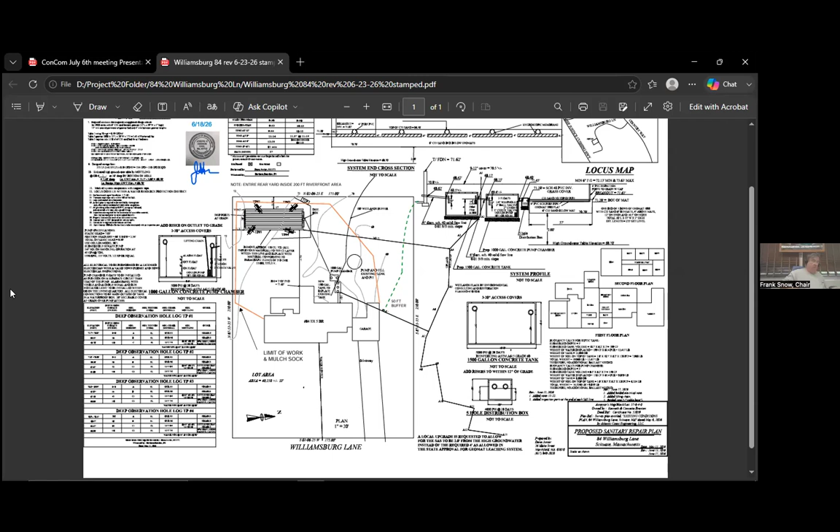Great, thank you. Sure. Okay, so this is a notice of intent for a 5-bedroom septic replacement. The resource areas on this site include proposed work within the 100-foot bordering vegetated wetland (BVW). It's 92.6 feet to the proposed septic tank. We're also in the 200-foot riverfront area, and the entire rear yard is in the riverfront area.

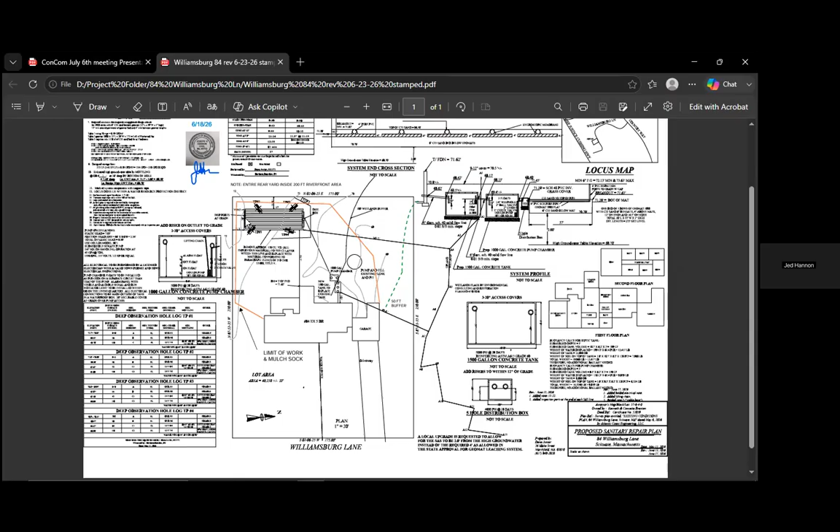The layout, as you can see if you zoom in, basically puts in a new 5-bed system with a 1,500-gallon tank, a 1,000-gallon chamber, a D-box, and a leaching field. The orange line represents the erosion controls. The circle represents the existing dated system that will be pumped and filled.

As required by Title V. The impacts to the resource areas, let me pull up those numbers. And they're all temporary, right, because everything's below grade. With the BVW, it's 113 square feet, and the riverfront area is 1253 square feet. But again, everything will be below grade.

All disturbed areas will be loamed and seeded, and erosion controls will be kept in place till the end of the project. Board of Health has reviewed this. We got a few comments back, we updated the plans, and the plans before you represent all the updates. Their only remaining comment is the review and approval from the Conservation Commission. That is all I have. I'd be happy to answer any questions.

Jenn Smith? I agree, the resource areas are in buffer to BVW and riverfront. Board of Health is okay with the plan. I don't have any other comments.

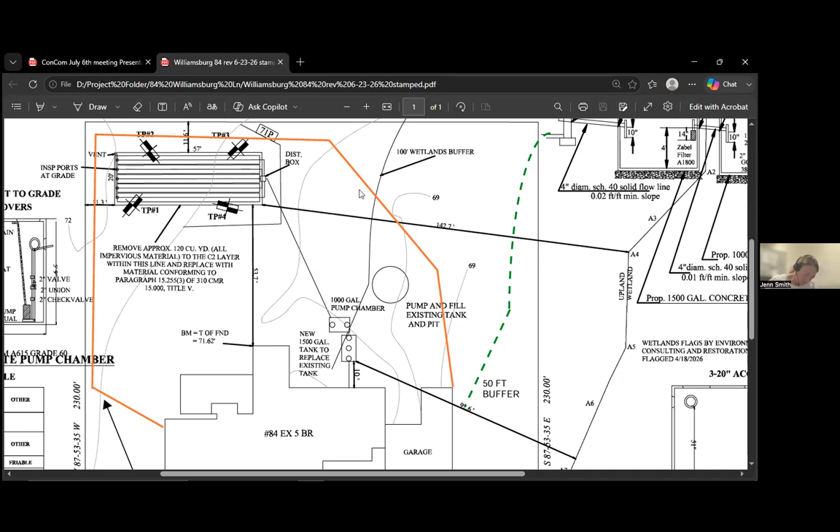Okay, I make a motion. Jen, is this 'close' or 'close and issue'? Close and issue. Okay, I make a motion to close and issue at 84 Williamsburg. It's a motion from Penny, do we have a second? I'll second, that's from Eric. All in favor? Roger, yes. And Frank, yes.

Great, okay, thank you Jed. You need Jen? Right, thank you, yeah, oh and Jen Foley. I'm so sorry. Jen says yes. That's awful, I'm offended. Still recovering from the heat from last week. I apologize, sure, something to blame it on. All right, thank you, thank you.

All right, so now we are on to 81 Surfside. Is this a continuance? 232 Country Way, no. It's 232 Country Way. Oh geez, I'm sorry, skipped down one, sorry.

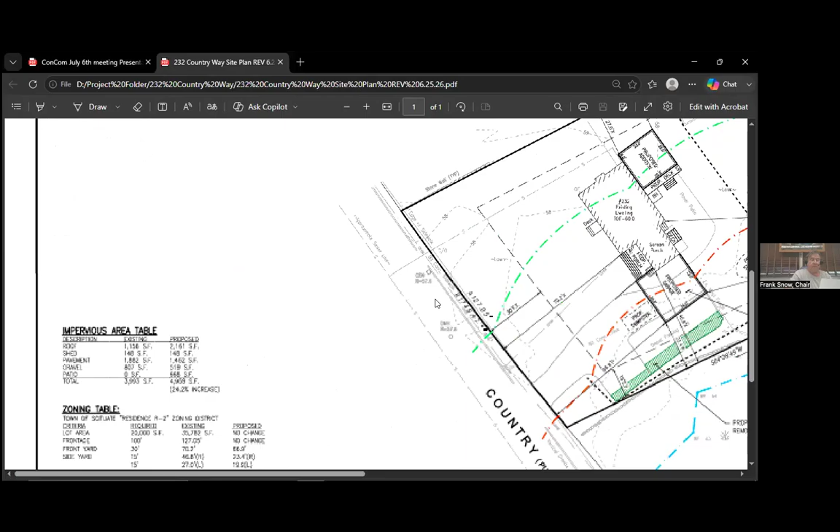On July 6, 2026, 6 p.m., the Scituate Conservation Commission will hold a wetlands hearing under Chapter 131, Section 40 of Massachusetts General Laws and Section 30700 Town of Scituate Code of Bylaws for a notice of intent filed by Nicholas Moore for the construction of an addition within the buffer to a wetlands resource located at 232 Country Way, Scituate. Abutters and other interested parties are invited to attend. Information to access the meeting is available on the agenda posted on the website.

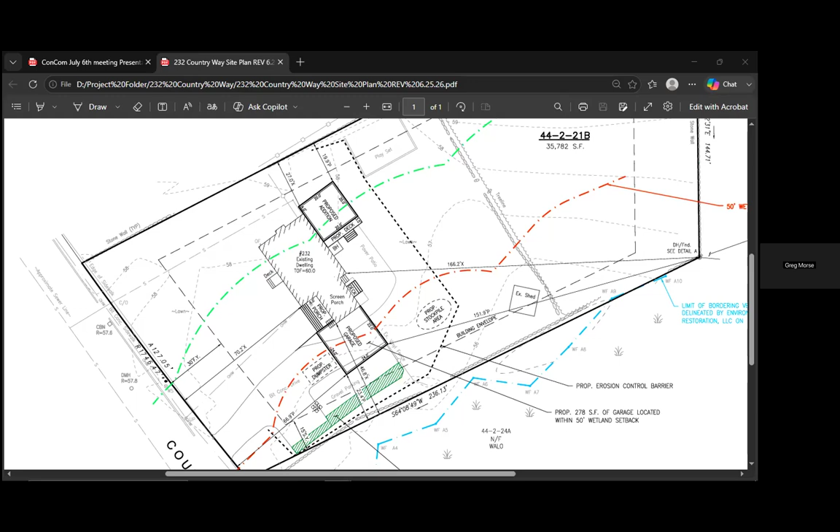Okay, so Greg, can you just walk me through the paved driveway? Where does the paved driveway end, is it on the back side of the proposed garage? Essentially, yes, there's a fence that goes from the back corner of the house over to the side lot line. And the paved driveway goes right up to that fence on that side. So you're going to leave the paved driveway that exists, just cutting out the part where the garage is, that's correct.

And then you're going to leave the gravel parking area? We're going to leave gravel parking with the exception of what you see in green there, a piece of gravel parking and a piece of the asphalt turnaround that gets cut out. It's about 308 square feet in its entirety that gets cut out. I see that, yeah, okay.

All right, I guess I understand why the garage belongs on that side of the house. That's typically where people already enter, and to put it on the other side you've got issues with the property line setback, and it just doesn't work well for the house. And the addition on the back is in the hundred, not as significant. But I do agree with Eric.

I think, maybe Jen, that there should be some additional plantings. What's your distance from the edge of the garage to the wetlands? Looks like it might be 40 feet. It's close to that, I don't have it labeled here, but we've got 35, we've got 23 and a half feet essentially to the side lot line, the stone wall, lawn right up to the stone wall. So I'll add some plantings inside that buffer area. I certainly heard that comment, and we'll add some buffer plantings in front of that wall.

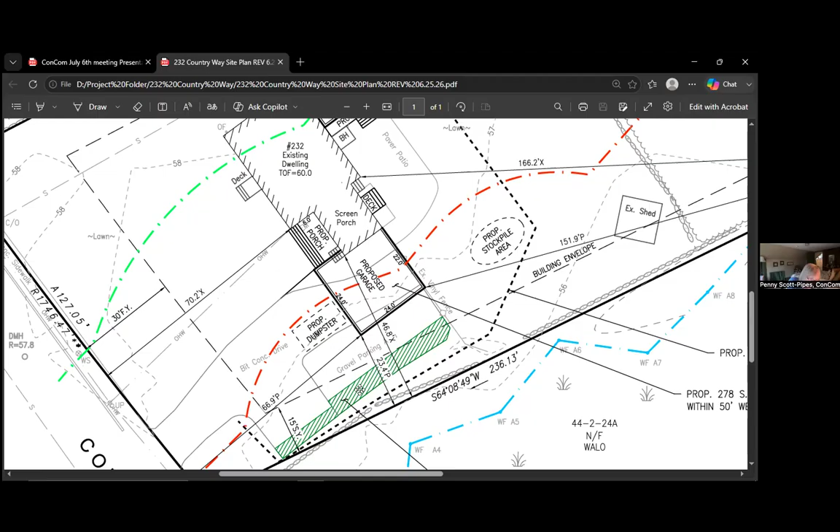Yeah, I think we've got about 11... 1, 2, 3, 4, 5, 6, 7, 8, 9, 10, 11, 12. We already have 13, so we're going to have to go to hearings, to the first one in August. All right, August 3rd.

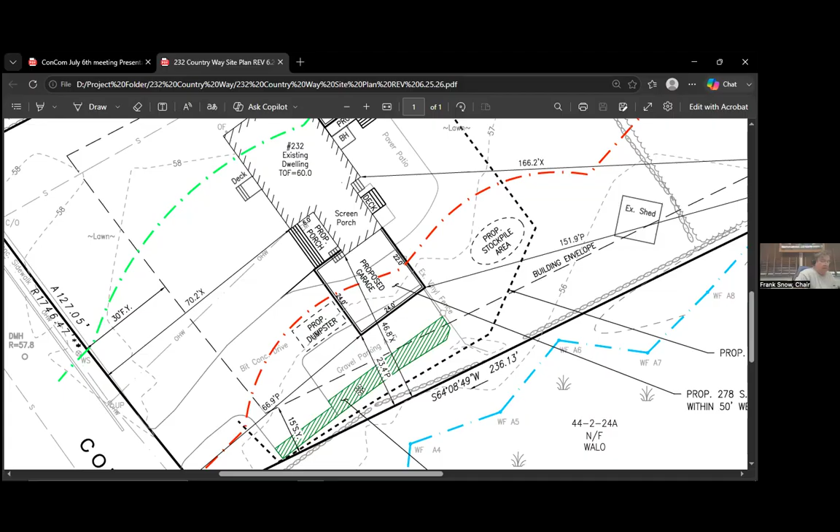I make a motion we continue. Can I just, Penny, wait. Greg, when you make those revisions, can you send them back to the commission as soon as possible? Yes, you'll likely have them tomorrow. That'd be great, that way we could have a chance to take a look and maybe get a little feedback. That would be really helpful. Okay, I'm sorry, Penny. Nope, that's fine.

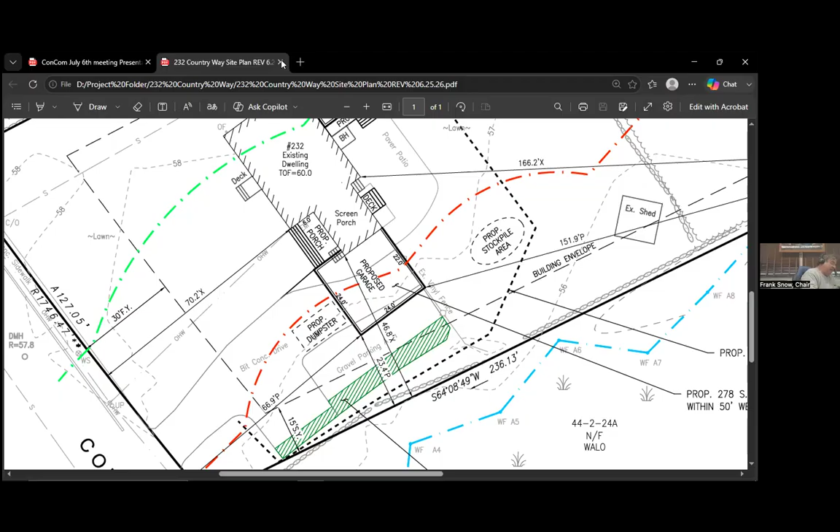I make a motion we continue 232 Country Way until August 3rd. Second, I'll from Jen, second that. I think Jen Foley got that one. So motion by Penny, second by Jen. All in favor? Eric, yes. Roger, yes, and Frank, yes. Okay, thank you, thank you.

81 Surfside. Yep, I think that's you again, Greg. Yes, it is, or somebody within the office. Excellent.

All right, I'm here on behalf of the property owner, Nir Drury, at 81 Surfside. This is a request for an amendment for the existing order of conditions. As you likely recall, there was an order of conditions previously issued. It was a rehab of an existing home, number 81 Surfside Road, but it included reconstruction of a deck that had failed on the Atlantic Ocean side of the house and installation of new pilings with that deck. It also included installation of a generator.

The project has been successful. The project is substantially complete. I actually filed a request for a certificate of compliance on it earlier this spring, but there were a couple of deviations, which are what put us before you seeking an amendment. Those deviations were outlined in the letter seeking the amendment that I submitted.

The first one is installation of 2 timber posts, which were on sonotubes to support the generator. The generator is on the left-hand side of the dwelling. It's the bump out that you see there. It's an elevated platform so that it complies with FEMA compliance. It was called out to be installed on the original design plan, but we didn't call out that there were going to be 2 timber posts supporting it. So we're asking for permission for those 2 timber posts.

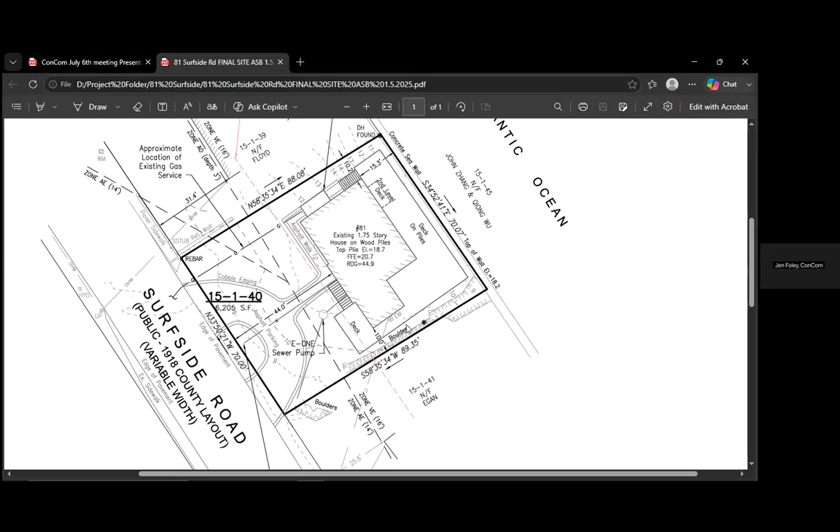Okay, that's a motion from Penny. Do I have a second? Second from Jen, Jen Foley. All in favor? Eric, yes. Roger, yes. Frank, yes. Thank you all.

Zero Surfside. This is a continuation. Someone from Merrill Engineering.

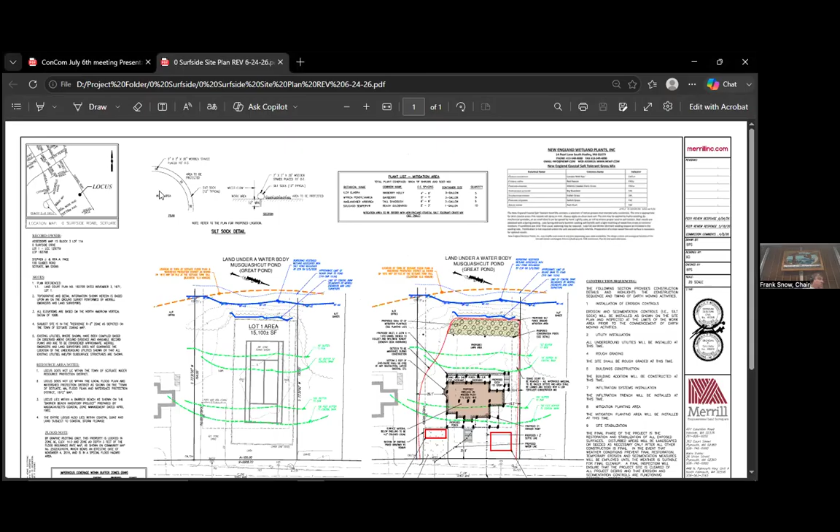Was this Brendan Sullivan before? Yeah, it was, but Xander's going to be representing. Okay, hi, Xander Oram, Merrill Engineers and Land Surveyors. Not sure, it's not letting me turn on my camera, but I guess that's not important. You sound good. Okay, good.

So this is a project, well first of all, I'm here on behalf of the applicant, Steve and Rita Pace. It's for a proposed home at Zero Surfside Road. This project was heard previously at the March 16th hearing. Since then, we've been continued a few times as we went through a pretty thorough peer review process with Lucas Environmental. So since then, the project itself has not changed, but we've provided much more detail on the resource areas, addressed some necessary performance standards, some construction methodology, and other points as well.

At this time, I believe we've addressed all of Lucas Environmental's comments, or they will be addressed by some suggested conditions of approval that they had. And since it's been a while since this has been heard, I could provide just a brief synopsis of the project if that would be helpful. I think so. Yeah.

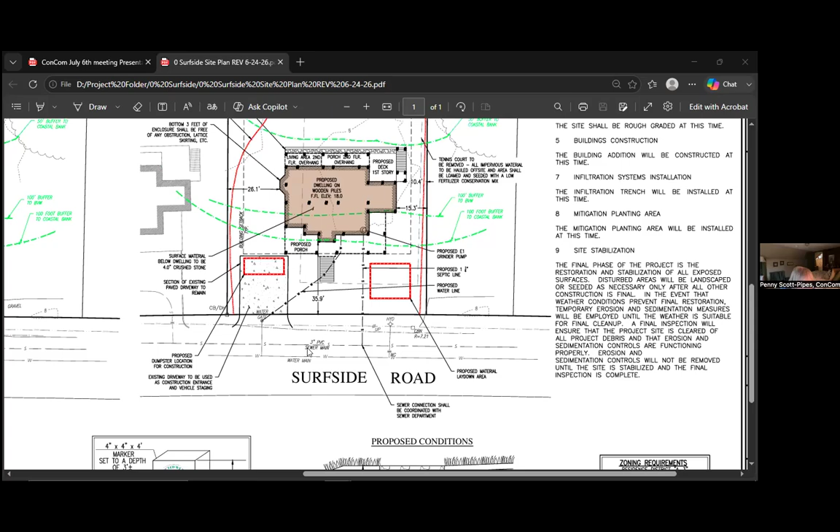The only other thing is that I do think we need the pilings depicted on that plan before we can close an issue. But other than that, I'm fine with this. Thank you.

Eric? So Xander, my first question is with regard to underneath the structure. I just would like to confirm that no enclosures will exist preventing wind and sediment transfer within that area underneath the house.

I believe that was one of the suggested conditions from Lucas Environmental, to prevent any lattice or obstruction. So we agreed to that being a condition. Okay, thank you for that.

Underneath that house, will there be space for parking, or is all of the parking activity going to be restricted to the driveway indicated on the plan? We've only proposed parking for the paved driveway. I don't believe they'd be able to fit under there with the current pile layout.

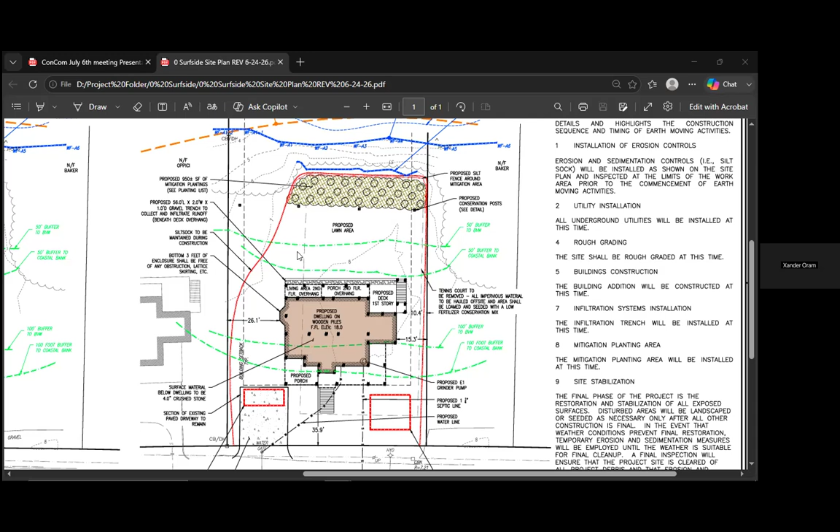I would say we'll try to get all the pieces in that we can, and then I don't know, Jen, how soon can we continue this one, or when should we move this to? I mean, you definitely can continue to August 3rd. There's only two other hearings, and then what we've continued to that one.

The July 20th is the one where we're over, what was the count? 13? You already have 11 hearings. So that ain't gonna happen. Yeah, 11 hearings on that one.

All right, let's see if we can get all our ducks in a row for August 3rd. I make a motion we continue Zero Surfside to August 3rd, and at that time, hopefully we can close it out, sir.

Okay, so that's a motion from Penny. Do I have a second? I'll second, that's from Eric. All in favor? Roger, yes. And Frank, yes. Okay.

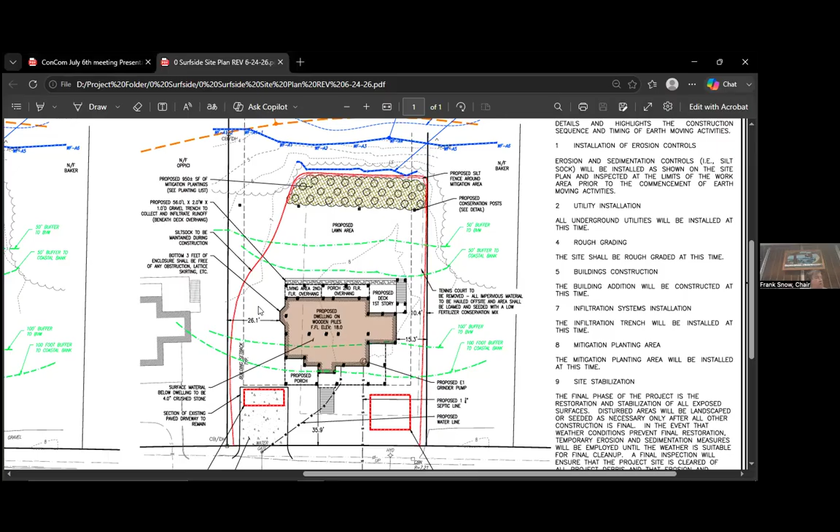Oh, nope, wrong one. Let's see. Do I have to open this one?

Yes, I do. So on July 6th at 6 p.m., the Scituate Conservation Commission will hold a wetlands hearing under Chapter 131, Section 40, Massachusetts General Laws, and Section 30700, Town of Scituate Code of Bylaws, for a notice of intent filed by James Landing Condominium Association for maintenance of invasive species within the buffer to a wetland resource located at Ladds Way, Scituate. Abutters and other interested parties are invited to attend. Information to access the meeting is available on the agenda posted on the website.

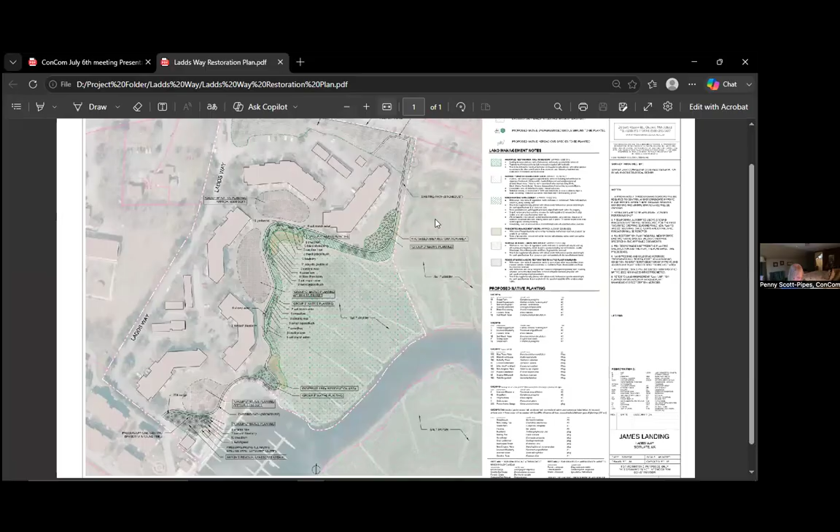And we have somebody from Wilkinson Environmental. Yes, Jared McGonigal here from Wilkinson. Good evening, everyone. Can you hear me? We got you. Great, my name's Jared McGonigal. I'm with Wilkinson Ecological Design as a senior restoration designer. We are representing the James Landing Condo Association for this project.

I also have other members here of Wilkinson, our staff, present tonight. I'll present the basis and scope for the project here, which is a property plan for invasive species management and the enhancement of native plant communities. The plan has been submitted with the accompanying land management plan, which further defines these targeted areas and the protocols of treatment for these species, including marsh bank planting restoration, woodland management, and some meadow planting in these open lawn areas. These areas were defined by our staff, and we have had client feedback at each step of the planning process with the association and with some of the stakeholders here.

So I'll present an overview of the plan. In terms of the urgency of this plan, the IPM parts of it, we hope to start work between August and September, as appropriate to the life cycle of many of the invasive species on the site.

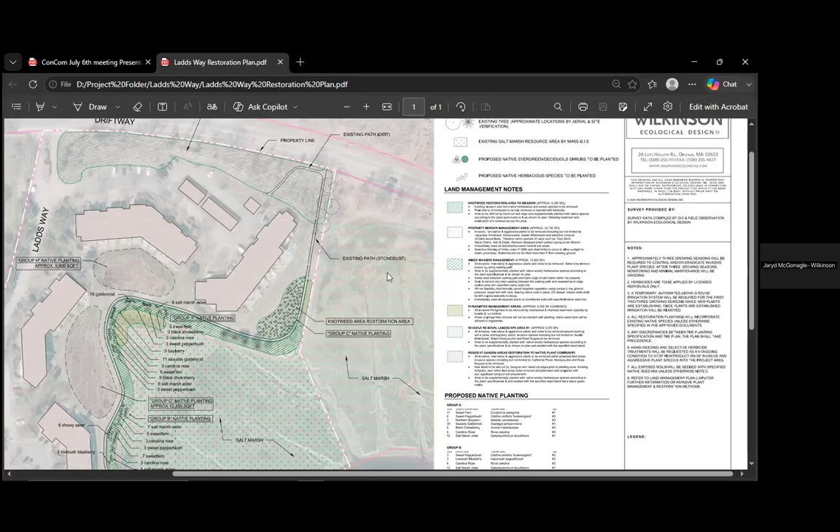Many areas of this marsh bank have been invaded with shrub honeysuckle, Japanese knotweed, multiflora rose, loosestrife, and some autumn olive. We have chosen, along the outer edges of this bank, where the yellow bubble is, a large area for invasive planting, where the walkway loop curves in and out. We also have another grouping further south where there's a heavily invaded colony of Japanese knotweed. We have selected these areas based on the densest areas we found of non-native plants.

So the first step would be the invasive eradication of these areas, and then we would proceed by seeding the bank areas with native meadow mix. The follow-up phase to that would be the containerized plantings you see here. This treatment timeline would be across the 3-year cycle of the permit. That's important to note for all of this work, but the priority for the initial work, at least, is along this marsh bank edge, the mixed invasive areas.

We also have 3 areas of Phragmites noted here in the yellow bubbles, which would be part of the treatment along the marsh bank, some of which edges into the salt marsh, where we would be using the bundle and cut hand method to minimize disturbance around the surrounding marsh. This has been our proven approach for treating these invasive stands without chemical impacts to the vegetation and soils around them within these sensitive areas.

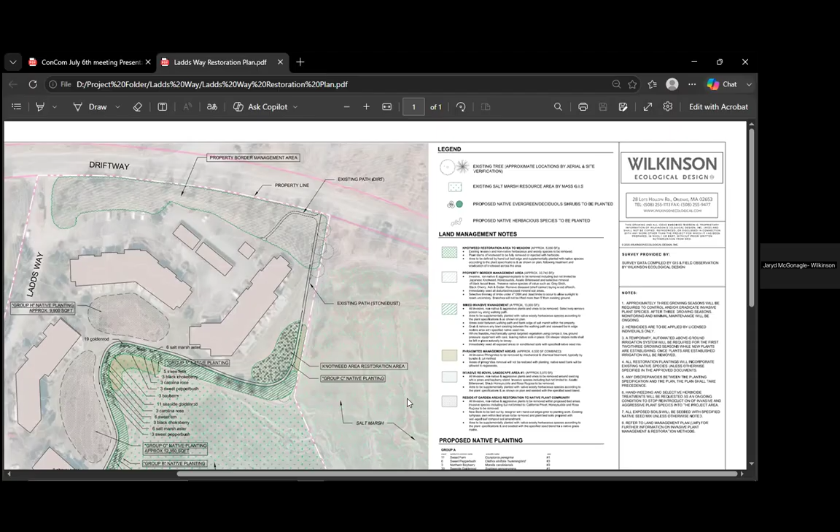There is a corresponding plant list for all these areas by group. If you scroll down to the proposed native planting on the right side of the plan, this would be Group A, and most of this would be plugged material for this particular area, appropriate to the exposure, and providing varying bloom times along with great pollinator habitat. Everything on this list is native.

Moving down on the plan, if you scroll left, there's another Japanese knotweed area adjacent to Building 4, directly seaward of that, where there's some lawn area. There's a big pine tree, but there's a stand of significant knotweed we'd be removing, and it'd be a very similar treatment there in Group F, as we're calling it.

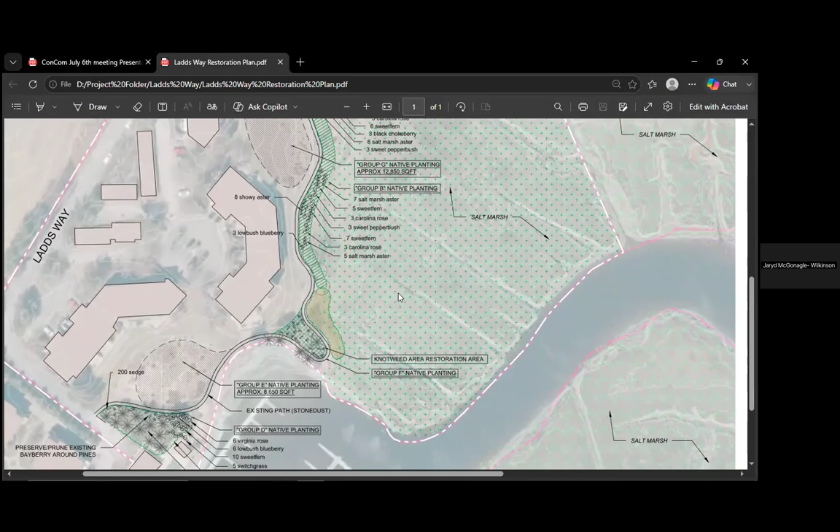Of plant species, moving down along the walking path, another area of concern around some existing white pines abutting the neighboring property, which I think has a garage or storage area. Backing up to that, there's lots of rugosa rose, and there's bittersweet entangled in stands of the pines.

We're planning to clear that area up and provide some appropriate coastal hardy native species, including switchgrass, sweet fern, lowbush blueberries, some Virginia roses, which will stay more manageable than the Rosa rugosa that's there, along with some sedges as an understory around the stand of pines that exists.

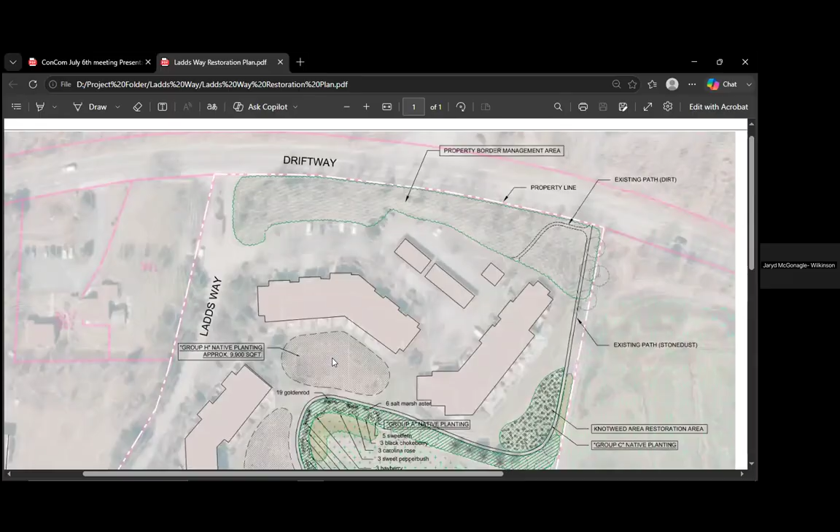The other part of this plan in this back area, if you look landward of the walking path, there's three distinct areas we're calling open meadow areas - Group E, and if you scroll up, Group G, and if you scroll up from that, Group H. It's important to note these areas were requested by the owner.

Currently they're largely sparse lawn, weeds, bare soil, some one-off ornamental plantings put in over time, non-natives. There's privet, there's yew. A lot of the plants have been sheared. The owner wishes to restore these areas into open meadow areas, maintaining some lawn around the edges to be mowed, but largely restored to native plant communities, providing beauty, pollinator habitat, and structural diversity to what is now really open and barren areas.

Then I think the last area is the largest area, the property border management, which abuts the driftway at the top of the screen. There's an existing dirt walking path through the woods here, but much of this area is heavy stands of Japanese knotweed. There's birch with some shelf canker decaying a lot of the birch colony. Our plan for this area would be extensive Japanese knotweed treatment, followed by understory seeding and establishment to really clean this area up for the long term.

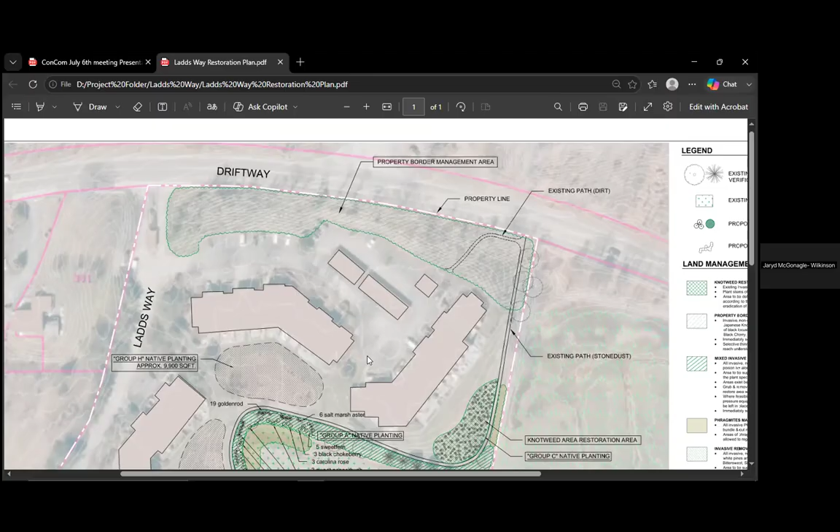Just some key points - I touched on the timing of treating in August and September when a lot of these invasive species are pulling carbohydrate stores back down. We'd want to treat with herbicide by our licensed staff at that time so it gets translocated into the root system and rhizomes, where it's most effective at killing the regenerative tissue of the invasive species. So timing is critical, and getting an earlier start on a longer cycle invasive species like knotweed is important, because it will take a few seasons of treatment to handle that.

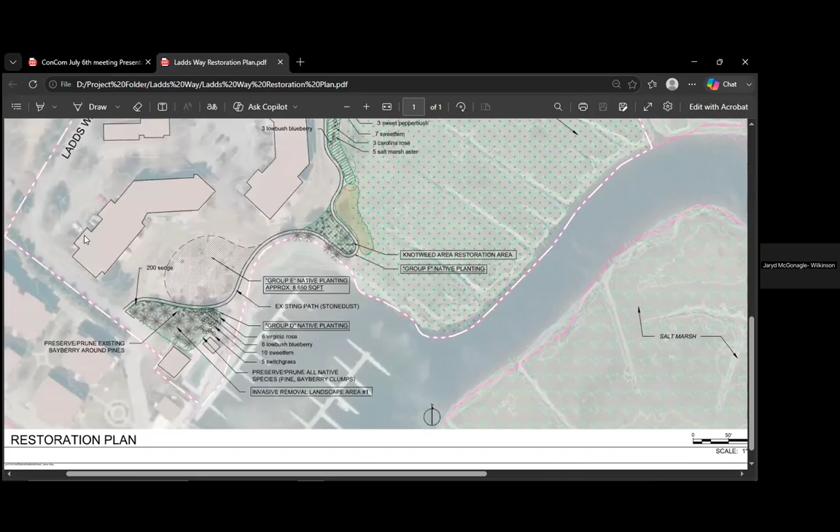Within the mixed areas, along the walkway on the seaward side, there's poison ivy, where we'd be proposing treatment as a public nuisance since folks are walking barefoot and it's growing over the path in some areas. So that would be part of this plan. We recognize poison ivy is native, but in this case it's growing out into the pathway in certain areas, so that would be part of this.

But we do feel that this is a fairly comprehensive and ecologically beneficial native planting strategy, which we're excited about.

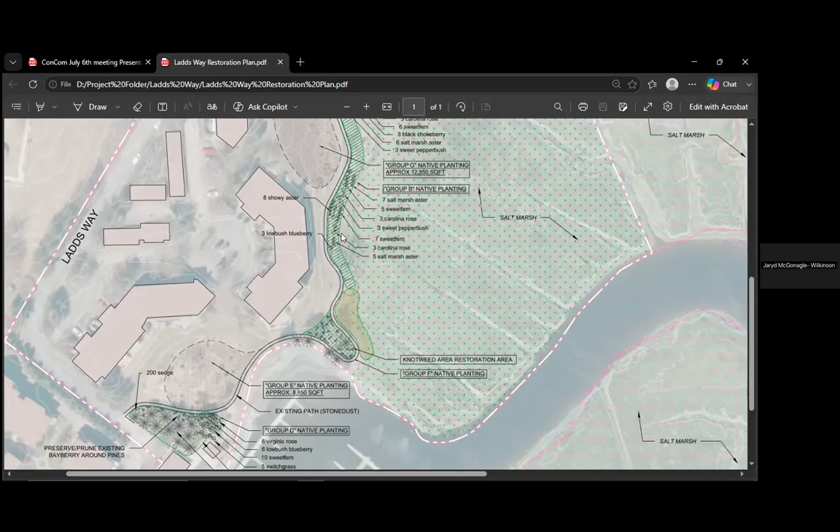Good, yeah, this is the way this was filed. We have a particular type of set of conditions that we would incorporate, allowing for appropriate monitoring and reporting, and just ongoing communication over the process. Absolutely, yep, and I can make sure I share those with everybody if you want to view them beforehand.

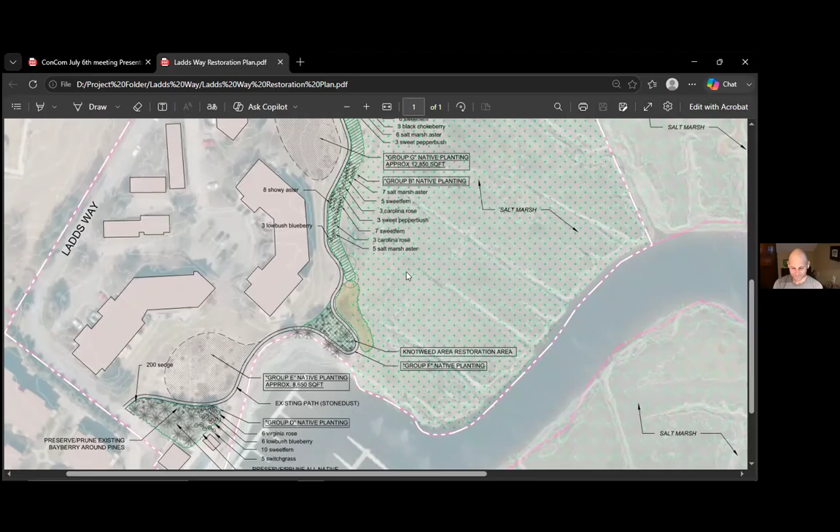Indeed. Well, I just want to say, just from jump, this is a very impressive plan that's being presented here tonight, and I appreciate the depth and amount of work that I'm sure this took. I also want to acknowledge that I think this is a significant ecologic benefit to the area, especially given the location of this property adjacent to the marsh, as well as the conversion of certain lawn areas into meadows, as well as the removal of substantial invasives. And there's quite a cocktail on this site, that's for sure.

I think I do have a couple quick questions as it pertains to the invasive removal process. Jared, you did sort of touch on it, just that it might take more than one season for some of these invasives to be eradicated through the various means that you've described. Does that mean that there'll be a fallow period before you start seeding and planting plugs? I mean, I would assume that there would be, but I just wanted to confirm that before you've confirmed that all of the invasives have been removed, that you would be holding off on introduction of the native species.

Yeah, that's correct, Eric. Maybe I didn't explain it quite right, but it's a two sequence approach where sequence one is the invasive eradication, followed by at that point we're looking for like an 85% target rate as we assess these areas. That tends to be our threshold, and after which it's determined that we're not getting resprout, we apply the seed mix. So the invasive management and the seed mix in turn provides some cover and is suppressing a lot of what might come up in future seasons. The planting is following that, if that makes sense.

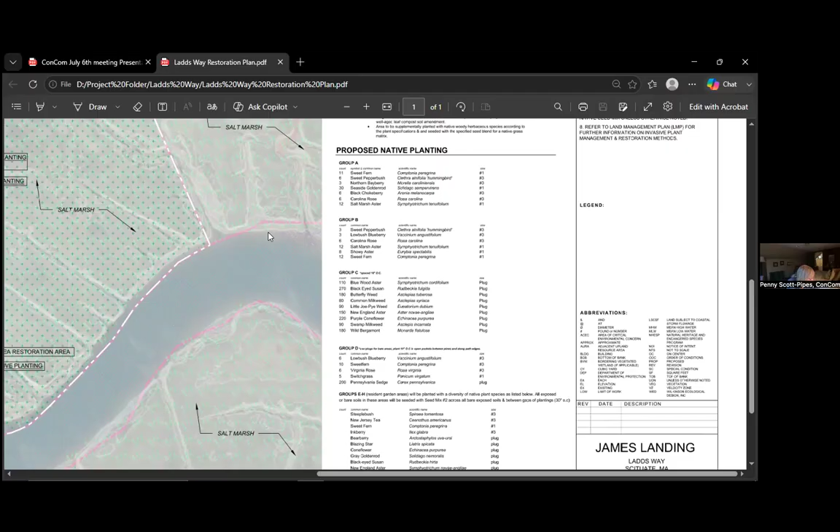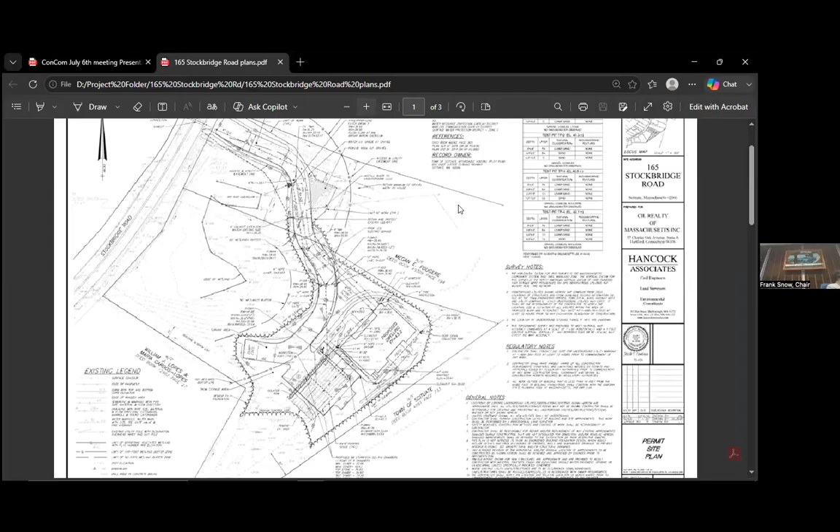I'm looking for a sheet on that one, we got a couple of nasties coming up. I don't see a sheet, I think I can wing it. I'm coming, give me one second. Jen, if you're looking for stuff, I don't know that I have anything for 11 Conway Terrace either. No sweat, all right.

On July 6th, 6pm, the Scituate Conservation Commission will hold a wetlands hearing under Chapter 131, Section 40 of Mass General Laws, for notice of intent filed by CIL Realty for 165 Stockbridge Road, Scituate, for construction of a new dwelling, associated driveway, septic, and stormwater. Abutters and other interested parties are invited to attend. Information to access the meeting is available on the agenda posted on the website. And we have someone from Hancock Associates.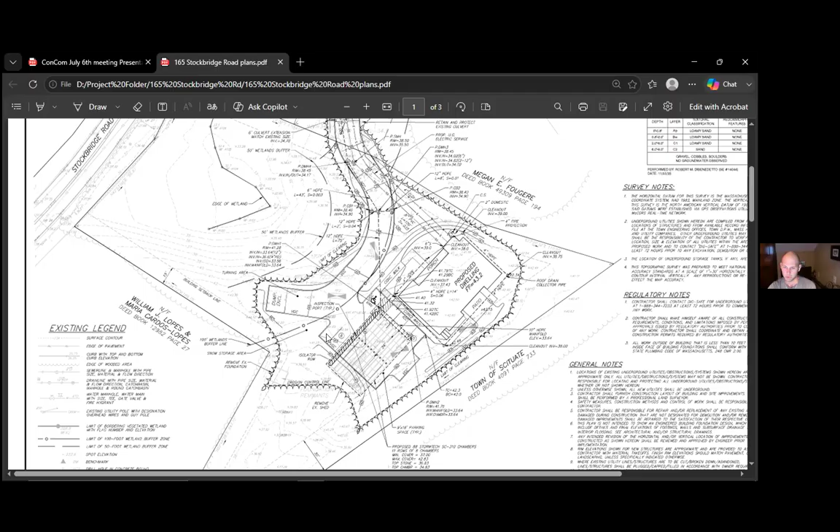Sure. And just another note, maybe I missed it, I do apologize if so, but is there any mitigation proposed for the work happening within the 100 as it relates to this project? I didn't happen to see a mitigation note.

So we haven't proposed any mitigation. We're trying to keep the limit of clearing as close as we can up to the new driveway there, but that's not to say we couldn't provide some invasives removal and some mitigation plantings to kind of fill out that buffer area between the driveway and the wetlands area.

Yeah, excellent, I appreciate that, Jacob. And as it relates to the invasives, again understanding that we are going to peer review the project and stormwater is going to be looked at, et cetera, maybe next time we see each other, if you could have a comprehensive mitigation proposal for the invasive species as well as mitigation plantings.

Yes, and we'll include that in the revised plan set with the responses to the peer review. We can work on that. Excellent, that's all I have for now. Okay, great.

Roger, no additional questions or comments from me. Okay, do we have anybody in the audience?

Yes, we do have one abutter. He's unmuted. Just state your name and address for the record, please.

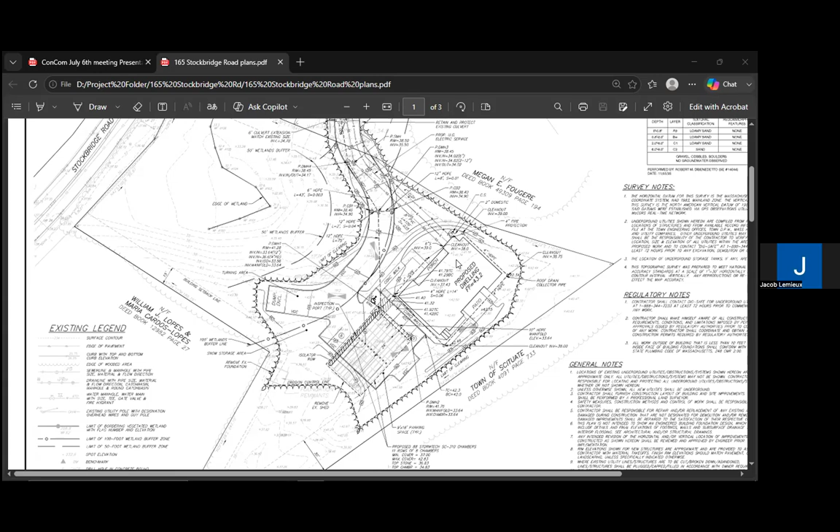Yeah, that works well for us. Okay, great. So I make a motion we continue 165 Stockbridge Road to August 17th. That's a motion from Penny. Do I have a second? I'll second, that's Eric. All in favor? Roger, yes. And Frank, yes.

Great, thank you. Thank you very much. You have a good night. You as well.

I guess why don't you give a quick update? I don't have too much. Since the last meeting there were a few changes the commission requested be made to the plan, so it could vote on the fullest plan in front of it. That was to locate a utility line missing from the plan, the water line coming in off of Marshfield Ave.

The commission also requested we follow up with DPW on the issue of the proposed removal of the concrete wall and sidewalk portions, which are on my client's property. It was clear to us the commission was ambivalent about that concept, being that even though it's in a fairly dilapidated state, it's still a public amenity on private property. As a result, we've decided to remove that proposed activity from our proposal, so the wall and sidewalk are still shown as being on the property.

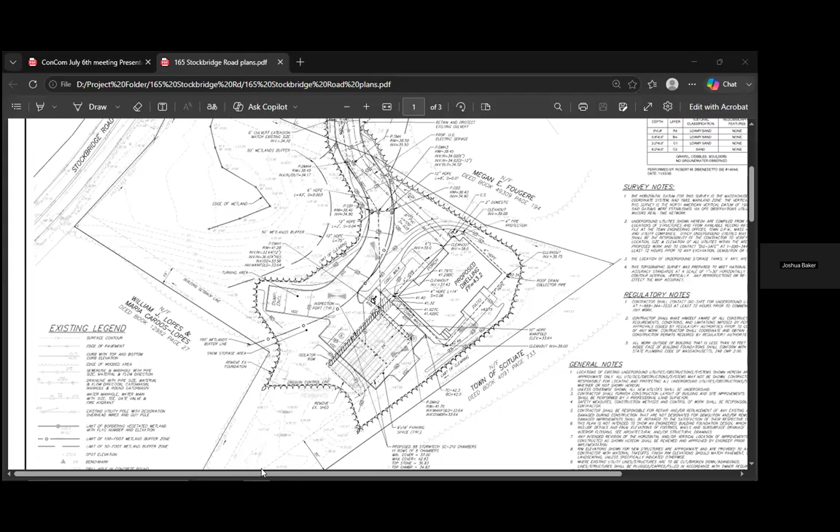Jeff, hold on a second. Josh or Jen, can we switch? We need the plan on the screen. Yeah, sorry, I'm pulling it up. Okay, sorry Jeff, go ahead. No worries, we're looking at the Stockbridge Road project in front of us.

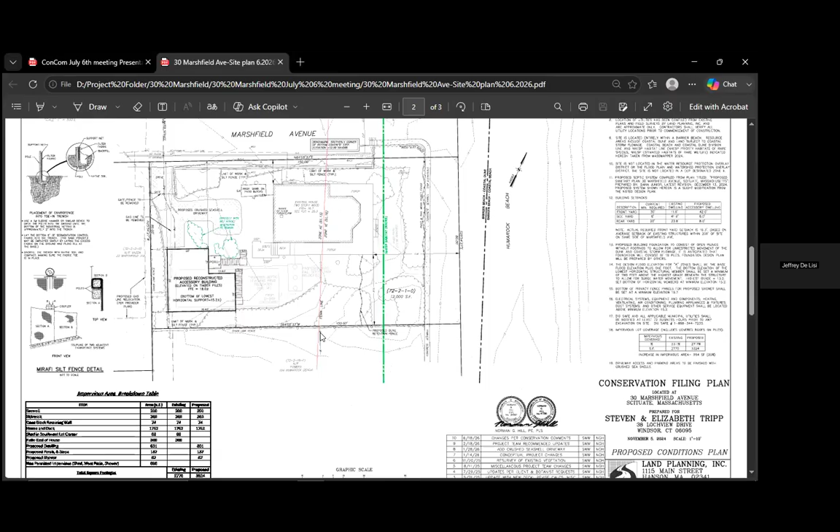So, the water line, the fact that the wall and sidewalk are no longer being proposed to be removed, and then the third issue was the impervious calculations, now shown by the engineer as opposed to by my client. On sheet 2 of the revised plan set, bottom left, there's a chart. Essentially what's important about that chart are two things.

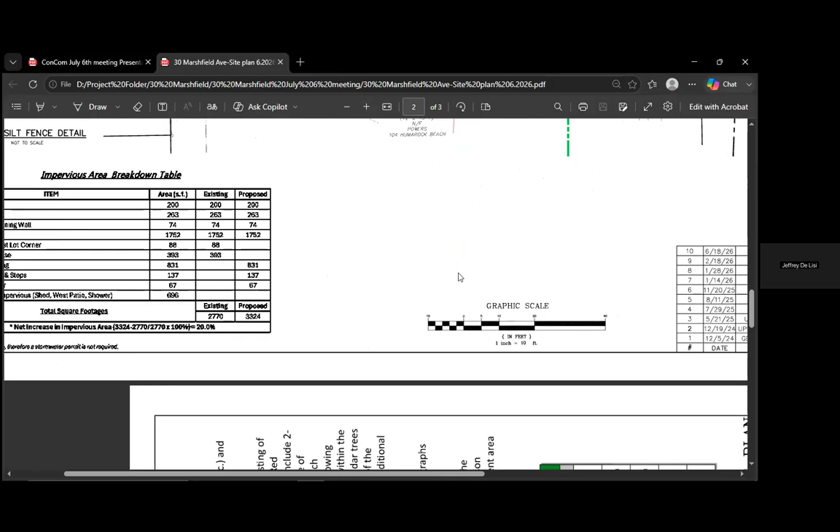One, because we propose to put back, or not have as part of the activity we're proposing, the removal of the concrete wall and sidewalk, which is all impervious area, in order to offset that we've proposed to remove a patio on the east side of the house. So the impervious calculations account for removal of that patio, and it appears our calculation has us under 25%. So that's it, just those three changes.

I believe Mr. Tripp is on this call tonight, and that's it. So if you have any questions, we're happy to answer them. Okay, thank you, Jeff. You're welcome.

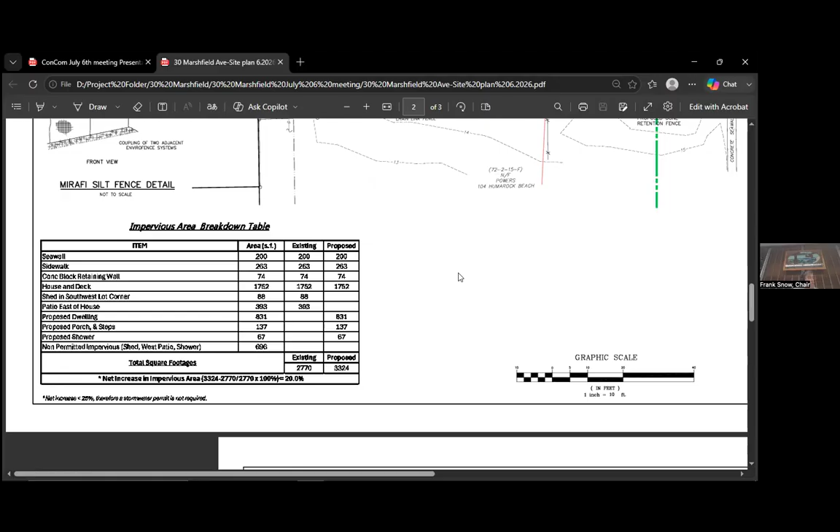Jen, do you have any other comments? Yeah, no, I agree with their calculations, so we're not triggering stormwater with the plan as proposed. I guess I'd say any concerns the commission has, they should be as specific as they can be about it. I have other comments I guess I can make, but I'd like to hear if I can go later, that would be great.

Sure, okay, Penny? Oh thanks, Frank. This is just... I am still betwixt and bewildered by this whole project. I just don't like the accessory dwelling, it's too big. You've got too many stairs. I don't know, I'm not in favor of this. I don't know what else to say.

Okay, well let's have some discussion, circle back. Eric?

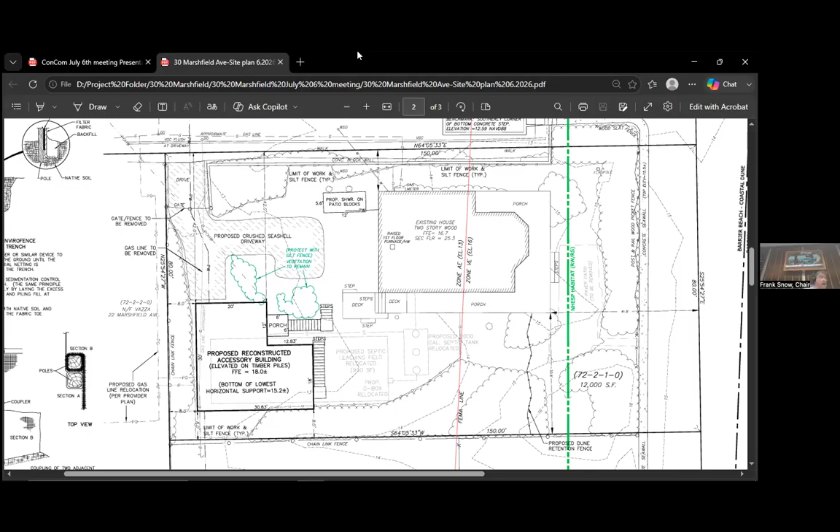All right, we're on to 83 Rebecca Road. So yeah, Jeff De Lisi here, 83 Rebecca Road.

I'll have Dylan walk the commission through the revisions to the plan, but what we've done is revise the house design to make certain that the house is no closer to the seawall than where it presently is. This is a raise and reconstruct.

We are going from a circumstance where we have a foundation of about over 1,000 square feet, and we're reducing the amount of ground coverage, meaning objects that touch the ground, to less than 50 feet, which obviously is a substantial improvement.

Dylan will show you where on the plan we've kind of almost doubled the size of the proposed mitigation area as well. So go ahead, Dylan. Thanks, Jeff. For the record, this is Dylan Brady with Grady Consultants.

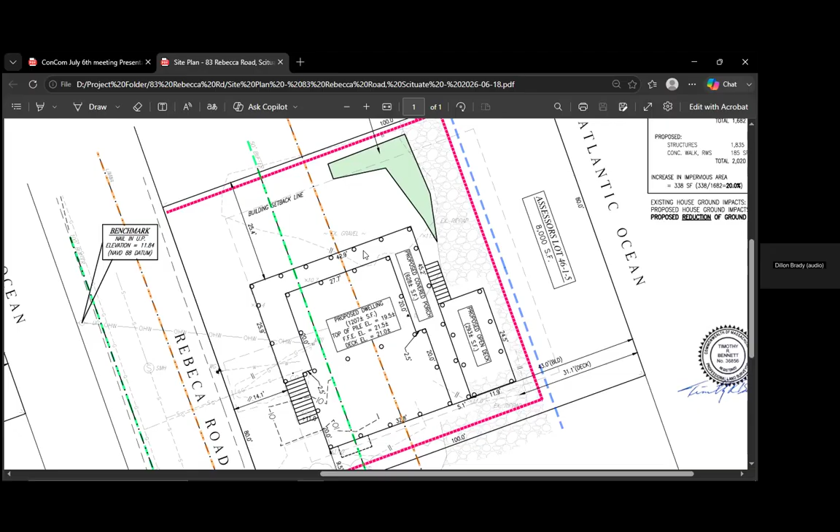So yeah, I just wanted to address some of the concerns that I heard at the last meeting from the commission. So like Jeff mentioned, we pulled back the proposed house so that the primary dwelling is further from the seawall than the existing. The existing is 42.7 feet, and the proposed now is set back at 43 feet.

The building size has also been reduced. The original impervious increase was 24.8%. It has now been decreased to 20%. There were concerns about the building size, so that has been reduced to address that.

There's a question about the type of pile being used - you're going to use a typical timber pile. There were concerns about the size of the mitigation area, so we increased it from originally 115 square feet to 207 square feet. And I know the Wasakis did talk about being amenable to using any sort of vegetation that the commission recommends.

And with that, I think that addresses all the comments from the last meeting. So I'll just turn it over to any additional questions you may have about the project.

Any kind of vegetation that can go on the site is great. As much of the area that can be kept natural, whatever that might be. I know it's a gravelly, cobbly kind of area - that is helpful for the impacts of storms as they come over the seawall and go across the site. Thank you.

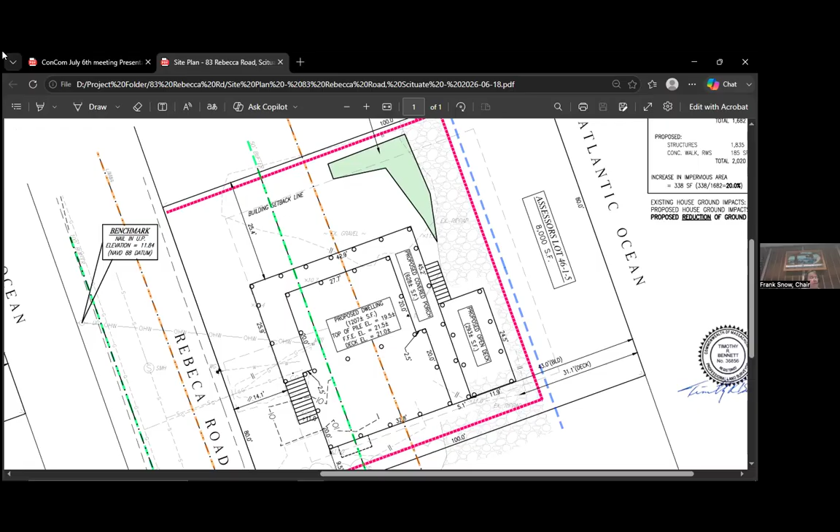Thanks for the motion, Penny. Thanks for the vote. You're welcome. Thanks everyone, appreciate it. Have a good evening, good night, have a good evening, you too.

On July 6th, 2026 at 6 p.m. the Conservation Commission will hold a wetlands hearing under Chapter 131, Section 40 of the Mass General Laws, and Section 30700 Town of Scituate Code of Bylaws for a notice of intent filed by Mary Alice Loring for maintenance and vegetation within the coastal resource area, located at 11 Conway Terrace, Scituate.

Abutters and other interested parties are invited to attend. Information on the meeting and access is available on the agenda posted on the website. And it sounds like the applicant wants to continue this.

Yes, the representative's not available tonight. Okay, when? He would like July 20th, but I don't think we can do it. So August 6th? August 3rd - today's the 6th. I make a motion we continue 11 Conway Terrace till August 3rd.

Is that a motion from Penny? Do I have a second? I'll second that, from Eric. All in favor, Roger? Yes. Frank, yes. Okay, what do we have left?